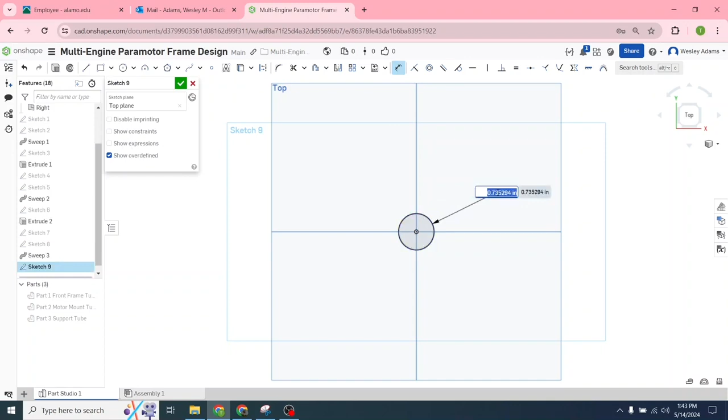Left click center point circle, hover over the center until it highlights, drag that out, left click the dimension tool, left click the edge of center point circle. We want that 0.73, hit enter. Close that out.

Let's go to front plane. Left click on sketch, left click front plane, left click the line tool, hover over the center, left click, drag that out, left click again. As you drag that away, hit escape.

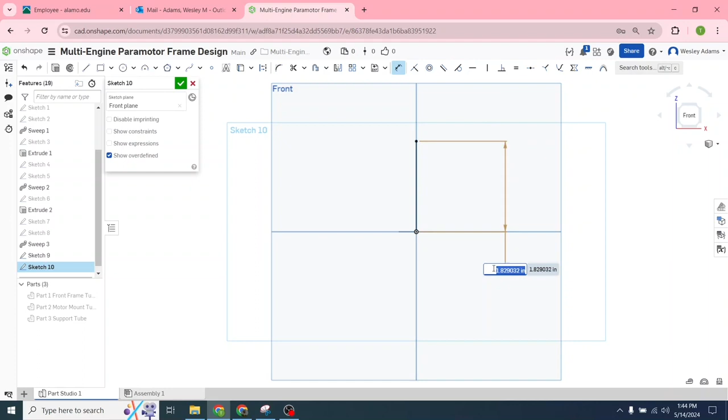Left click the dimension tool, left click and drag that out. We're going to set that at 7 inches, hit enter. I'm going to use the wheel to drag that out. Close sketch 10, left click on the edge of the cube. That'll get us to isometric view.

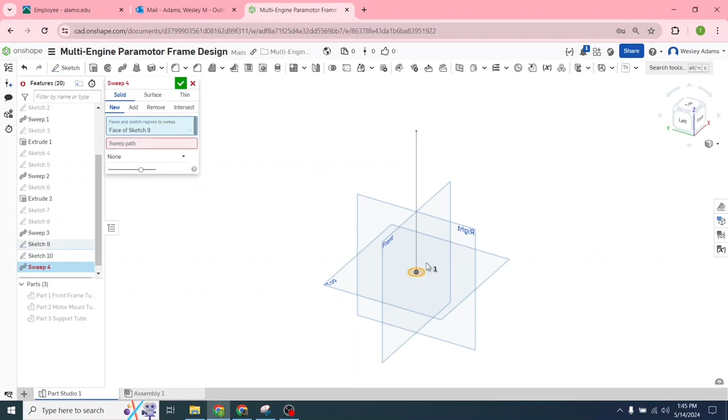Let's go to sweep. Left click on the circle. Select sweep path, left click on the line. Make sure it's solid, new, face of sketch 9 and edge of sketch 10. Check mark to close that out.

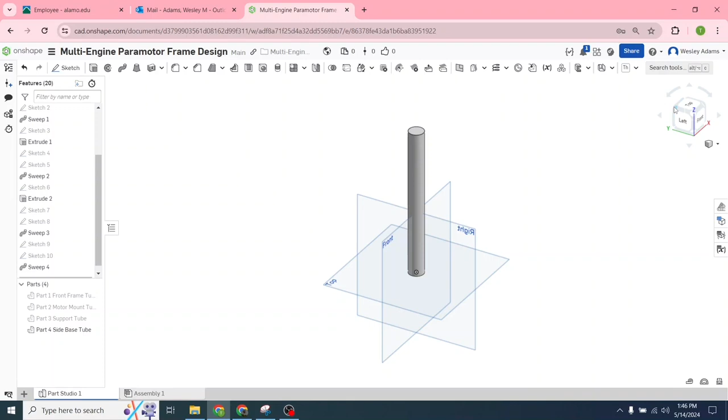We're going to right click on part 4. We'll keep part 4 in the name, and this will be the side base tube. That was the same color as before. All right, pretty simple - head and turn the visibility off for part 4.

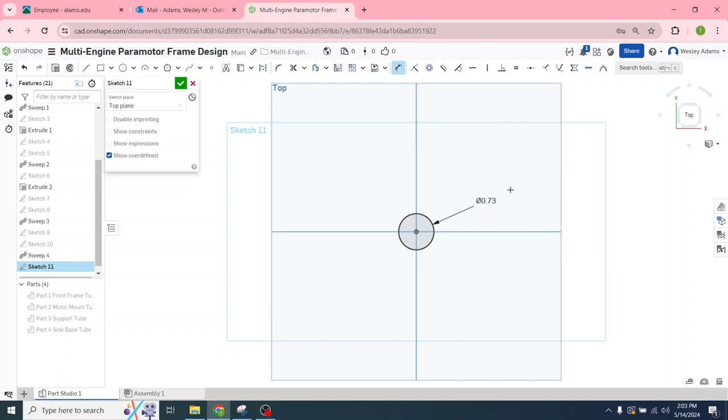Let's go to isometric view, left click top view, left click sketch, left click top plane, left click center point circle, hover over the center, drag that out, left click on the dimension tool, left click on the edge, 0.73, hit enter, close that out, left click on the edge here, left click front plane, small, use the wheel to scroll out.

So you can hold the wheel down on the mouse and drag that down. If you roll the wheel without holding it down, it'll scroll in and out. Left click sketch, left click front plane, left click line tool, hover over the center, drag that out.

Let's go about 2 inches, we're going to resize that. Then left click, drag away, hit escape. Let's go over to sketch fillet, left click here, left click. We want radius of the bend to be 1, hit enter. Hit enter again and it'll set it.

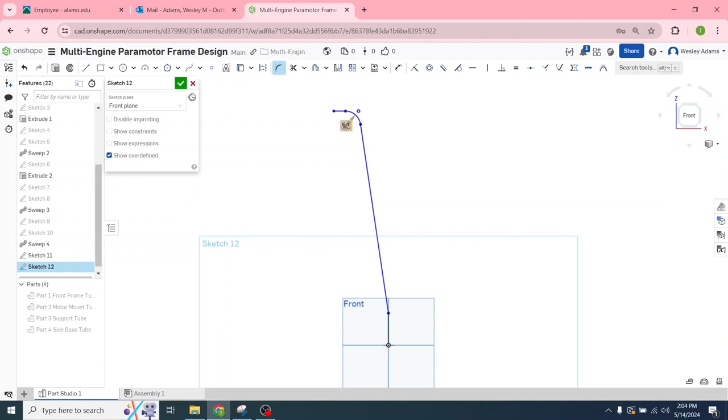I'm going to drag this down so it'll be out of the way because we're going to change this length if it's not long enough. Left click sketch fillet, left click here, left click here. Want to keep that at 1 inch, so hit enter. Want to go 1 inch.

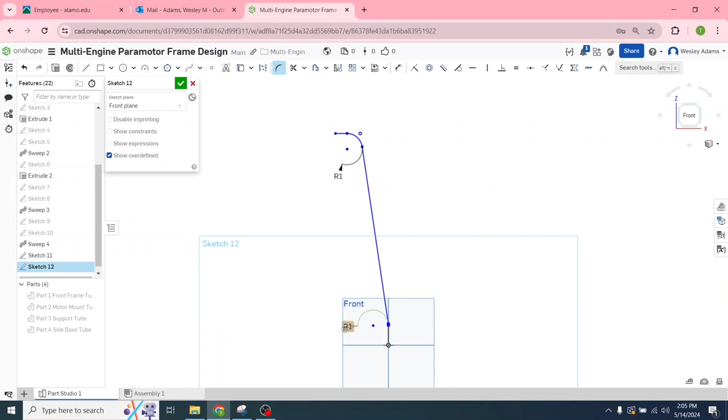I want to drag that R1 out here on this side to show the radius of the bend. Hit enter. Now let's go to the dimension tool. Let's set this to be exactly 1 inch because the connection where this part inserts into the front part of the frame is 1 inch thick. So we need to make sure a straight piece is exactly 1 inch.

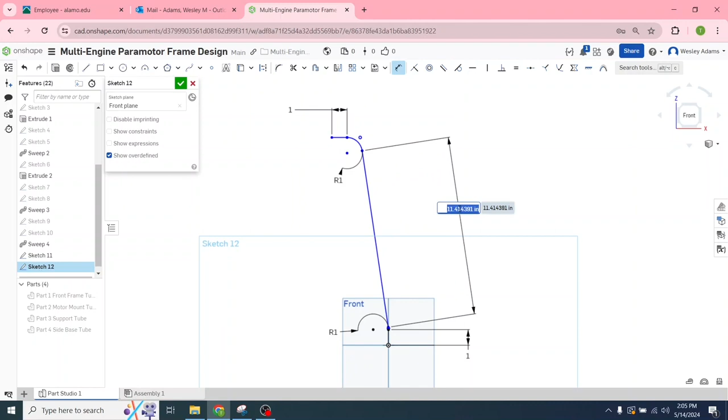Down here, same thing - we want that set at 1 inch, so the bottom piece it's going to insert in is 1 inch. Want to make sure this is long enough, so we're going to go 33 inches, and we may have to adjust these. Scroll that out using the wheel so we can see our dimensions.

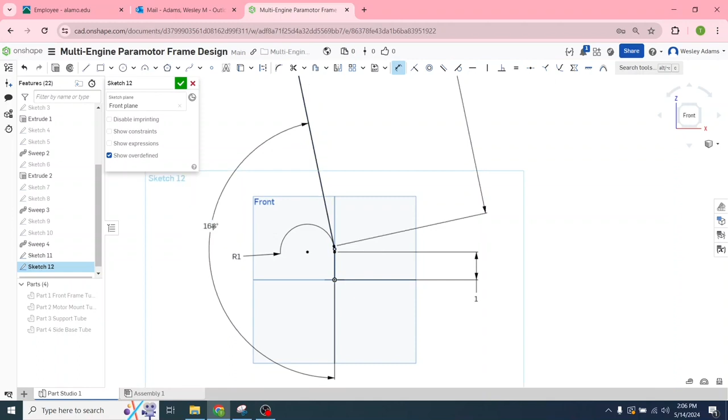The only thing we've got to do now is adjust our angle. Let's start at the angle here, and left click here. Left click on the longer piece and let's go left click again, 168 - that'll set our other dimension. We're still going to look to see what it is.

So we're going to left click here, but it's not going to let us change it. And that's going to be 102. Hit enter, and we'll leave it like that.

So now that we've got our dimensions set, let's look at this. We did the overall length, we drew out the line from the circle. Now what we need to do, once we've got the radius of the bend set, degree of the bend set, and length of the tube and the segments of those bends, now we need to sweep it.

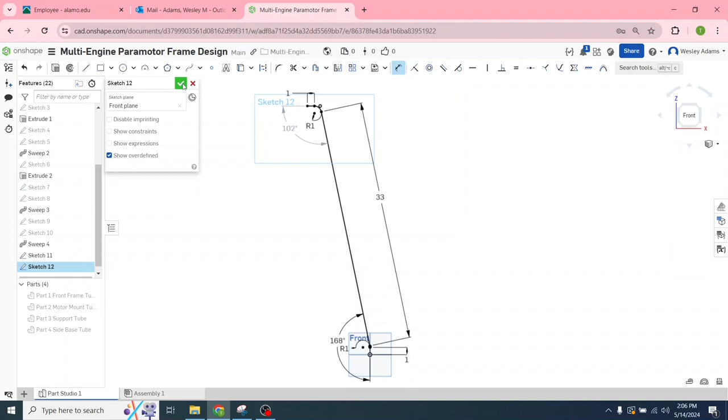Left click on the check mark. Let's go to sweep. We're going to scroll in using the wheel. We're going to go to isometric view, scroll in. Now this is where you got to be careful or it'll mess up - you have to get each segment.

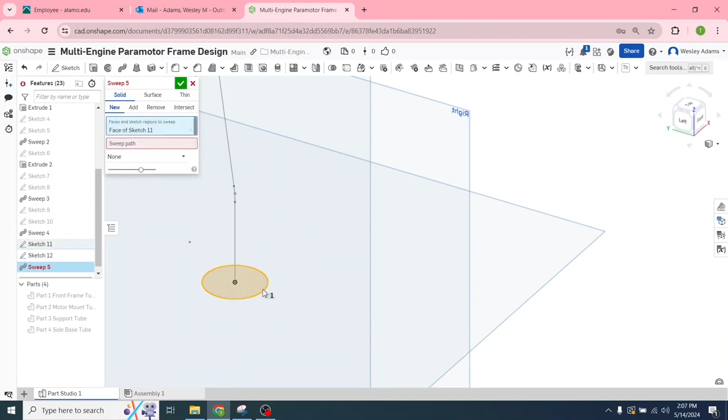So we're going to select the circle. On sweep path, if you make a mistake, it's going to more than likely be on this. It needs to be solid, new, face of sketch 11 - that was for the center point circle.

Left click on that first segment, left click on this smaller segment. That's where you're going to mess up, is on these smaller segments. If you get an error, that's where it's going to be at.

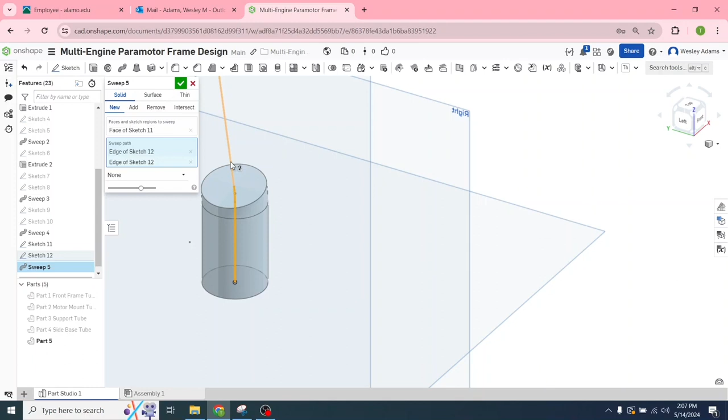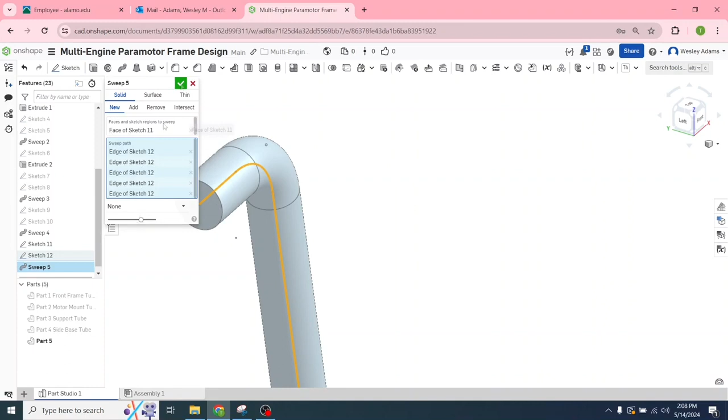Left click on the longer segment, and that's why we need to zoom in to make sure we are selecting each one. Left click here, left click on that final segment once you highlight it. So it should be sweep 5, solid, new, face of sketch 11, select all those paths. Left click on the check mark, go to front.

Let's look at that, I'm going to scroll out. There we go - so now we've got part 5 created.

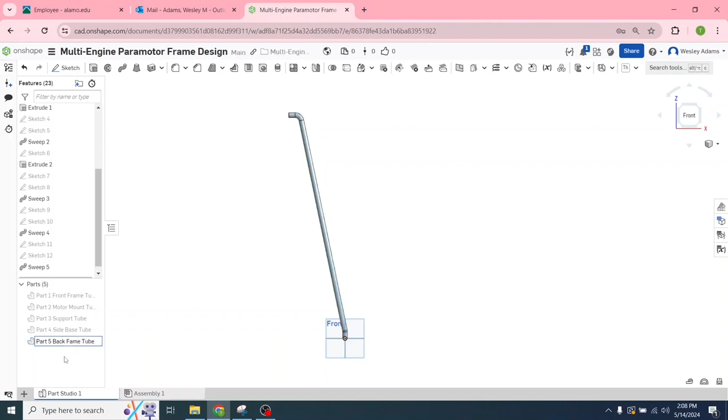We're going to right click, we're going to rename it back frame tube. Right click on that again after you hit enter.

We're going to go to edit appearance. We're going to make it silver and then close that out. So that's all we're going to do on this one.

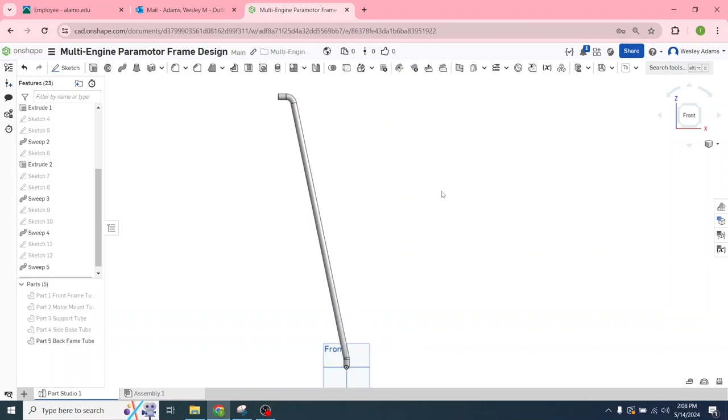Got to learn some new skills: sketch fillet, angles, radius of the bend with sketch fillet. And then we will create additional parts in the next video.